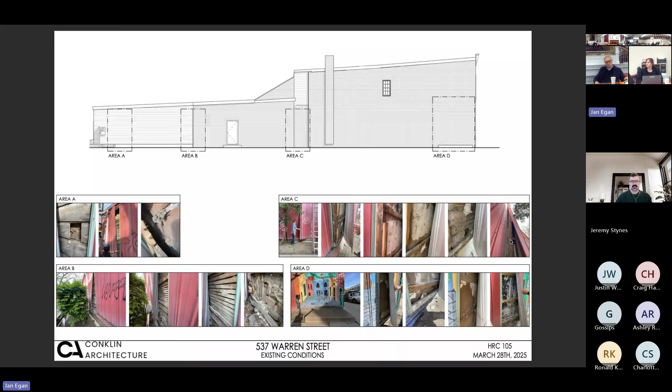Closer images - this is on the back portion of the building, close to the alley. There's wood horizontal siding, fiberglass insulation. This is down low, there's some brick mixed in, but it's largely a wood frame building back there. Next.

This is in the mid part of the building here. So we've got that lath again. There's some brick where brick walls used to be, a sort of party wall between the two structures, I believe.

Next. As we're closer to the front of the building here, this is the original corner, the original corner of 537, the rear corner. We're going to have to do some repair, there's going to be more areas like this where there's brick failure or brick missing. We're going to have to do repair work and repointing and cleaning up the brick.

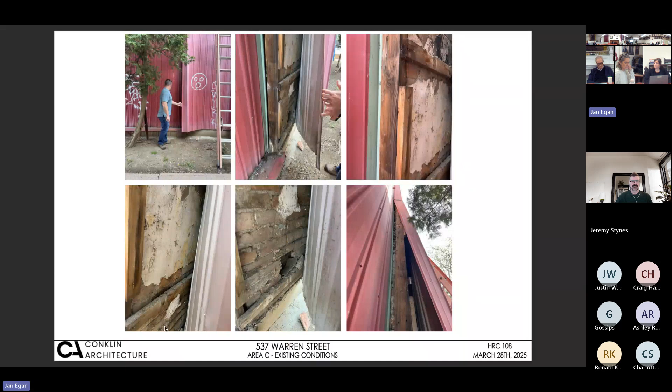Well, I'm sure there's opinions as to what we should do or not do with that. I think that's a conversation. Our goal would be to remove that. If there's a person or a place that would like to have this, great. I don't think anyone's looking to take it off and dispose of it into a dumpster. If there's opportunities for somebody or some group that would like to have it.

Next. Existing portions, existing drawings of the building.

The red is existing openings with windows that are going to come out and be replaced with new. So, Warren Street elevation: the current entry door is here. Window, it's not really a door, but it looks a lot like a door, and then some windows up top. These openings will remain. We're proposing to replace those with new windows and/or doors into the existing openings, not make new openings on this Warren Street elevation.

To note, at our last meeting there were conversations that we had proposed these windows in the center were going to come all the way down to the sidewalk. After looking at this, we've decided to keep those at the current height where they are, so they'll be about a foot or so above the sidewalk, as they are today.

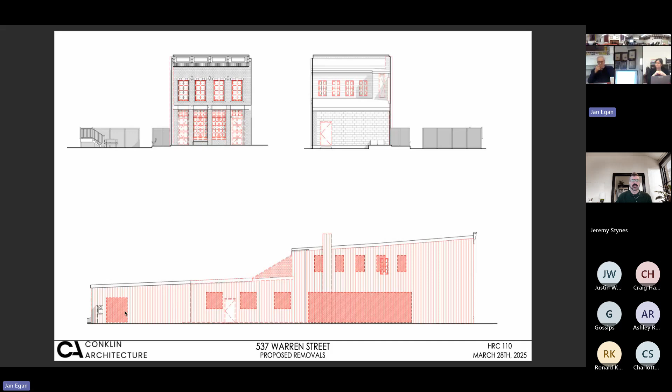I'm not sure of the historic significance of the park side of the building, as I believe there was a building here at one point, but that's for you to tell us, I guess. Next, proposed elevations.

Again, we are going to clean this cornice up, paint it, new windows, new door, new entry door shifting to the uphill side. This will be the new entry door, the window, a fixed door that will just be sealed, and a new lower millwork detail across the top of the door, which we provided a drawing. We'll get there in a second.

The park side of the building, again, we're going to clean up that brick. We're going to add these windows, we're going to add this new glazed opening, doors and windows, the same trim work detail across the top of these that we're going to see on the front of the building. The brick ends at the original rear wall of the building.

Our goal was to break up this elevation of the building to make it look more as though it's 3 different buildings, even though it's one. So it's going to be brick, then more of a horizontal siding section in the center with 3 windows, and then we'll allow the sloping roof to remain on the back, keeping horizontal siding back there, chopping it up into 3 different components. The rear wall from the alley.

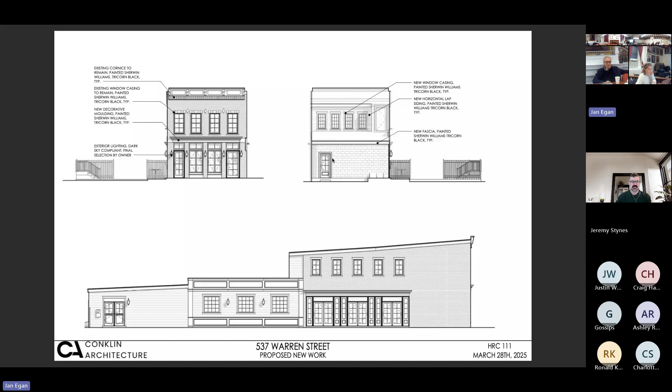Next, close-up renderings.

Renderings are tricky. Anyone who's done renderings would tell you they're tricky, especially trying to do shadows and working with the lighting, trying to make it look right. I think these renderings are a little bit, I'm going to critique them a little bit. It's the shadows, it makes it look a lot blacker than it really is. Just on our way up Warren Street coming here today, we were noticing all the brick buildings that are brick with black windows. And this sort of looks a lot more like, whoa, than what exists and what it will look like.

Black windows, and paint the trim around those black. That's our proposed idea right now. This new wooden element being black, and black fixed door, black window, black active door.

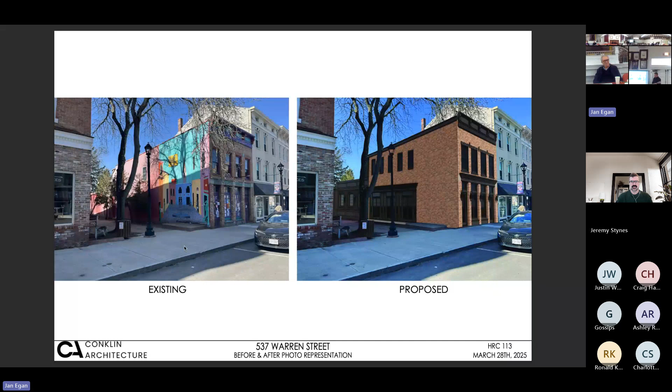I think we led with this slide, but this is just a before and after. So what we see today, the tin, the colorful front facade, and what we're proposing to do to it. Just sort of really clean this whole thing up and bring it back to life and make it an exciting part of Warren Street.

Another rendering from back in the park, comes off the side of the building. This is that rear section of the building where there's a door back here further. The image is hard to get at the right angle, but this was useful to look at. This is the midsection where we've got three fixed windows and a new parapet wall, to make it look like its own building. And of course the large glazed wall and a couple windows on top with the brick.

Are you doing any masonry repair on the brick?

We're going to have to, I'm assuming we're going to have to do some masonry repair once that tin comes off. I don't know what it looked like before the tin went on, and given there was a fire here, I don't know what condition things will be in behind there, but I'm expecting there's going to be some repair and repointing happening to the brick.

We usually ask for some kind of statement or formula to make sure the mortar is appropriate. So how does the committee handle that today? You should, we'll put a statement in the C of A or whatever document with your agreement that you will make every effort to test and match the mortar to the existing structure, so we don't end up with something that's a lot harder.

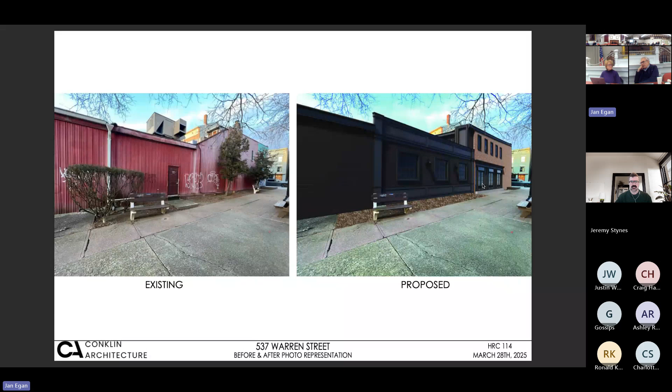Yeah, thanks. Another piece of information that was requested last time was more information on the window types and door types, so we added those to this.

Coming down the side of the park, this is an enlarged version of what we're proposing: currently a side light, active double door, double side lights, active double door, double side lights, and active double door, with a side light and transoms above each door opening.

Moving further down the park, we've got 3 fixed windows identified as type G—though I think we've actually got these labeled wrong. This is type D, the window going in here, 4 foot 10 by 4 foot 10, to give you some scale.

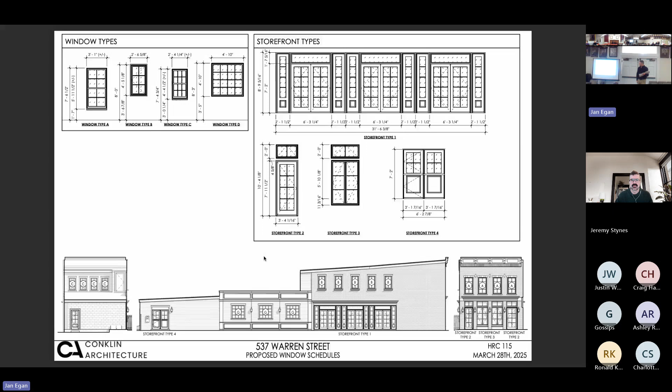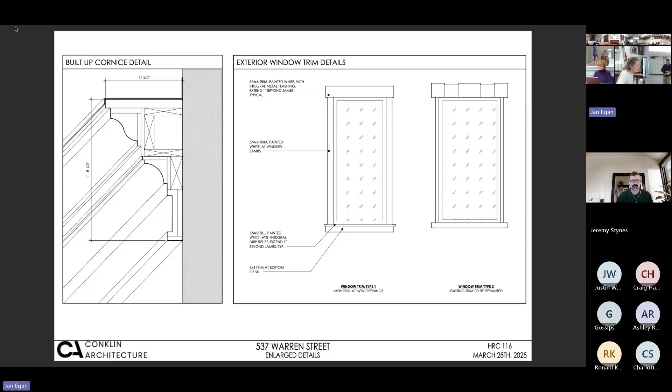Okay, so let's hear your thoughts and questions.

Well done. Jan, do you have anybody online? Is it all us? I have quite a number of people online. Thanks.

Let's see, okay, well we'll go with commission comments. I don't have any raised hands. I'm sorry, it's a public hearing, we don't need commission comments. I don't have any raised hands at this point. Any hands up?

Would anyone online like to speak about 537 Warren Street, the Mexican Radio building the architects have just presented? Hello, this is Matt McGee. I'm having a problem getting to the hand raising icon, so I'm just speaking up now. Matt would like to speak.

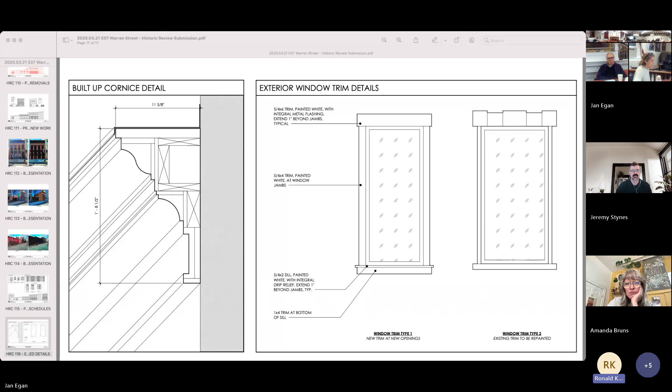Thank you. Yes, I would like to say I think this is an improvement over what's there now. I'd also like to point out, as a matter of interest, that the city has seen fit to have an open space where there had been density. The other thing I would say is, as far as the bricks go, the main concern you should have is that the mortar is softer than the bricks.

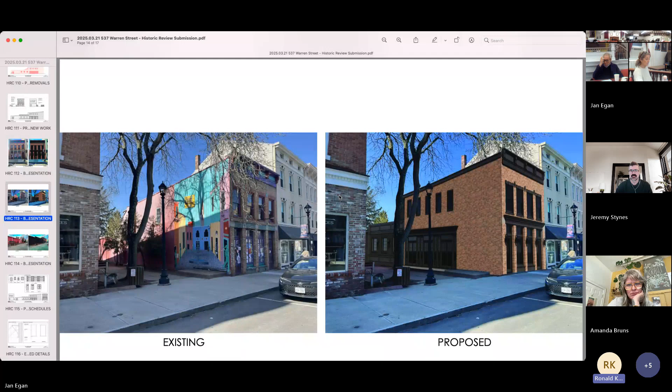The color is generally affected by the sand, so if you match the sand color to what would appear to be the more original mortar on the building, that will be a good guide. Also, these bricks are not as hard as modern bricks, so really hard cement will cause spalling. In freezing and wet weather, some of the bricks will spall and start to decay.

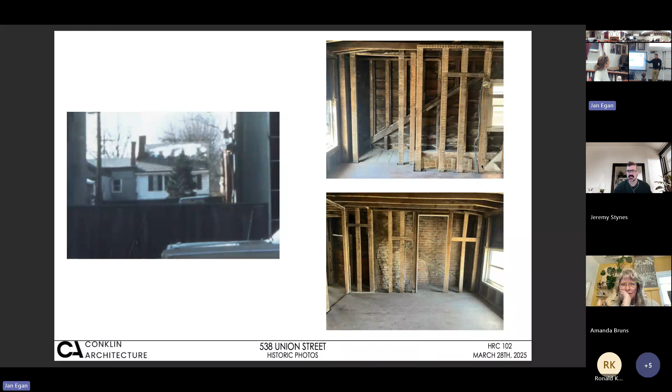These photos were important to share with the committee, as they're from what's today the third floor of the building. I'll make some forensic assumptions here that the front of this building, at some point in its original life, did not have that third floor with the cornice. We've got elements here that lead us to believe there were roof rafters - this probably had a more conventional gable roof at one point in its early life. Someone came in and added this dormer at the front to make more room upstairs. We're not looking to change any of that, but I wanted to point out that this building has seen different lives, as much of the buildings in Hudson have.

Existing front, existing Union Street, it's a very light gray or light blue. The shutters, the windows - all of these windows have been replaced in this building at some point already. There's no weights on these windows, just some sort of metal banding for a weight, which would have been much newer than the old ropes or chains. These are actually aluminum storm windows up top at this point. So all these windows have come and gone at least once in this building.

But our goal is to replace them. Even these existing windows here are storm windows in front of a 2-over-2. So we're trying to keep the 2-over-2, but the modern day version of that 2-over-2 window.

This is the roof structure on the back of the building, with the little covered porch. This little roof will come off, and we'll add a detail similar to the one over the front door, added over the door to the kitchen. And obviously we're going to add this dormer.

There was discussion at the last meeting about the front door to this house - is it original, and what shape is it in? So right here, area A, this is the existing front door. The photos are hard to show - it's wood on the outside, painted on the inside. The bottom rail of this door is not in the best shape; that's really the failing part of it right now, as weather over the years is causing things to delaminate and come undone.

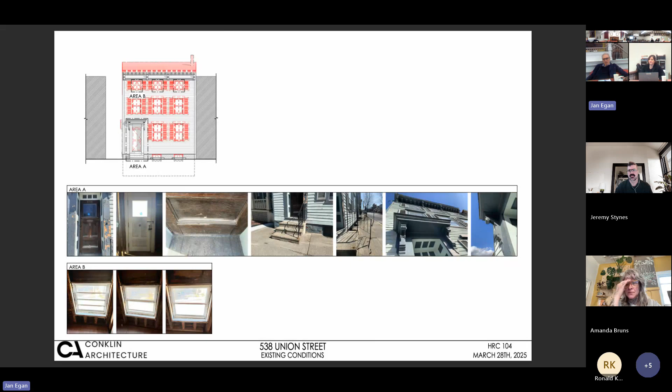If there was a need for an egress window, couldn't you put it on the side where it wouldn't be quite as visible? Just think through your options. Okay, we will take a look. You have large new windows to the rear, and so those might work better.

I might go as far as to say that's the same era as the front door. It's got very similar details that the front door does. Again, I think we would propose to keep that door and use it again instead of replacing it with a new door. And if we get into a situation where there are problems, then we'll talk about that.

We only have one side of the building that is really full exposure, and that would be the west side of the building, which would be a really narrow alley or sidewalk that walks past the building to the rear yard.

So taking out some windows, again, removing that back porch. As a part of this renovation, we're actually going to take the entire roof off and put it back on. It's just one of these dollars and cents decisions that we're going to put it back on in a like manner. But the existing structure, for structural reasons, the existing front portion of this roof is undersized and not in great shape. So as a part of fixing everything, we're going to be insulating this building.

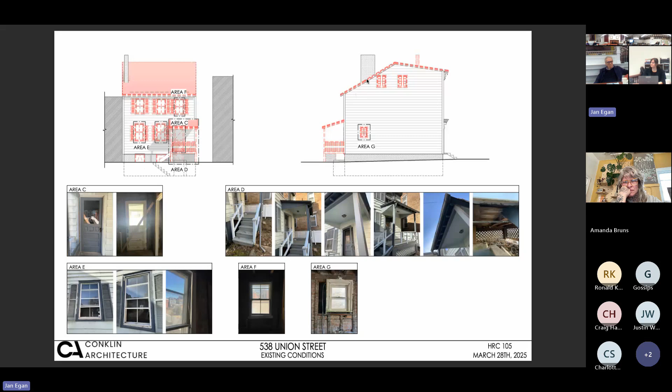Let's keep going. Next slide. Okay, so this is blown up pictures of the existing doors, exterior in front, exterior of back, inside. But this is just trying to highlight the fact that this is where it's failing. This existing door has had snow and weather beating on it for a lot of years.

The front stoop, the railing, that's a wrought iron railing. We will propose something as an improvement to that. So that's something that we will get back to you on.

I think in my mind, I expected that there was going to be another trip back here for this building, but maybe I shouldn't have made assumptions. We will have to come back to give you that information and look at the windows for the third floor and that sort of stuff.

So there's currently an area where you can see right here, there's a spot where there's a basement door, so you can see down underneath the back deck to get to a door. This is kind of the retaining wall, the door's over here. So this is a shot of the underside of the deck, but it will be removed and replaced with something more appropriate.

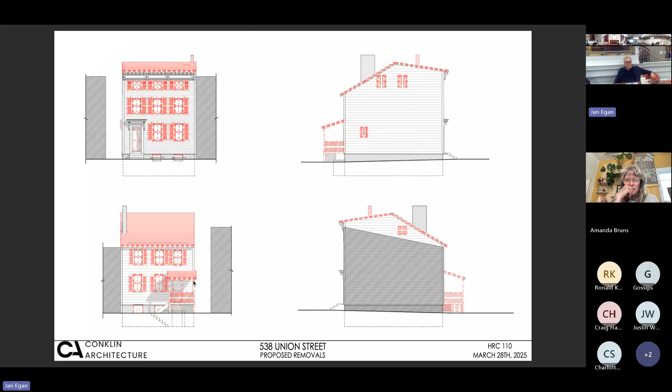I believe the proposal is that this upper roof, because of the pitch being almost flat, is going to have to be a rubber roof. The lower part where it comes around, the dormer, will be asphalt shingles. And the front of the roof that's currently there is asphalt shingles, and that would go back as asphalt shingles, facing Union Street.

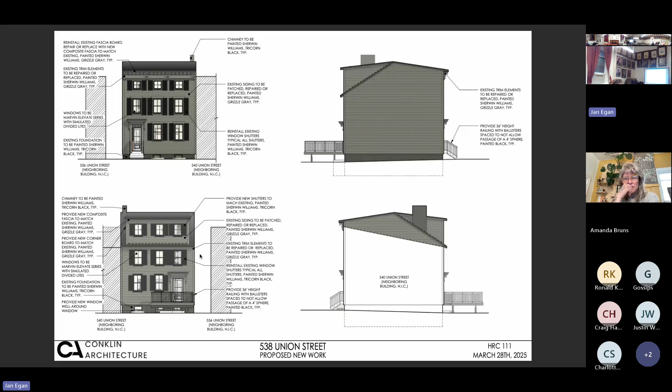Before and after, it looks a lot like it does right now, just with some repairs. There's siding that's broken and damaged and falling off, and we've got to replace what needs to be replaced, maintaining as much of the existing as we can.

All of the upper cornice will stay, and all of the details around the front door will stay. In the rear of the building, similar story—it's in pretty sad shape back there. We are going to clean it up, add the dormer, paint it, replace the windows, and upgrade the deck.

Windows. Union Street side. We were proposing those upper windows be casement windows. We will evaluate that to see if we can find a better solution that's more in line with what we need to be doing in terms of double hungs.

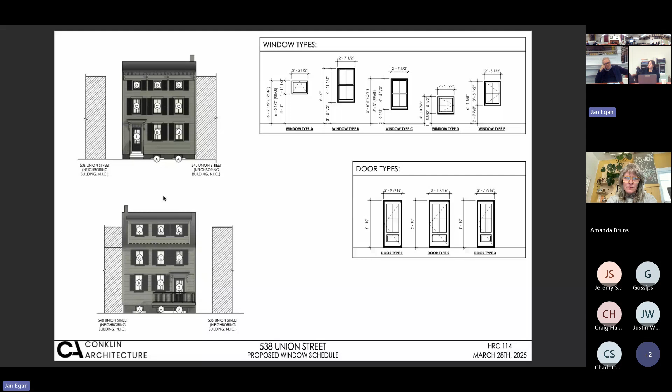In terms of a public hearing, the board needs to consider that. My feeling is that you're not changing any of the mass, not significantly reconstructing, deconstructing, or changing the shapes of any aspect of the building. You're not, God willing, removing critical historic materials, and you're not changing any of the openings, so I'm not sure it necessarily requires a public hearing. I think what you are doing is bringing the building back to life, which is pretty cool. That's really the goal of all of these projects.

Shingles, colors, exterior colors, shingles, light fixtures—any light fixtures, obviously we're going to do the dark sky compliant LED lights.

This is, maybe I'm wrong, maybe we did give you window information. So what do you need for the specs? So these are Marvin Elevate windows. Do the call-outs so that your taxonomy is right and we can follow it, and Craig can follow it. And then from those call-outs, we want spec sheets. For the window, if it's Marvin Ultimate, blah blah blah, we want the spec sheet for that.

So in terms of this slide right here, we have identified the exterior fiberglass color of this Marvin Elevate window. Do you need more information on the Marvin windows than what we're showing you right here in terms of colors and stuff, or?

I think if you can just grab the manufacturer's spec sheet for that specific window and attach those as part of your pack, it's very helpful for code to have that on file. I mean, I think we would be doing that for the code anyhow as part of our building submission—I just wasn't sure how much of those specifics the historic commission needed or wanted. We in code are part of the same process in other ways, with different lead responsibilities, but it's the same materials.

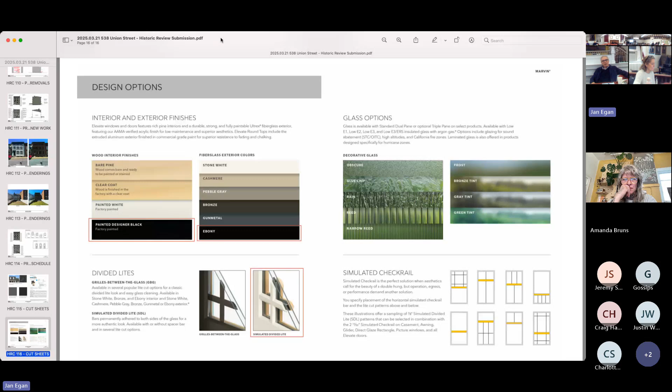Is this it? That's it. Okay, well, there you have it. So that was Union Street. Terrific. So you can call, write, or query any of us anytime. Certainly get in touch with Craig on the egress or any issues around that. And if you don't mind, I'd like to go back now and see if we can finish up on the Mexican Radio.

So we've heard from the public. Commissioners, thoughts and feelings on that proposal? I think it's a great project, done with a lot of thought and sensitivity, bringing an old building back. I think it's quite good for the town. I agree as well, I like the bring— other folks, John? I think this is excellent. I'm enthusiastic in my support.

The motion to find the application complete—Paul and Miranda, all in favor, aye. We've done the public hearing.

I motion to request the city attorney prepare a COA, contingent on the spec sheets, including the removal of the siding language that we discussed, and including the mortar language. We'll get—if somebody would remind somebody else—to get in touch with Kim on mortar.

Yeah, we have a commission architect, she just came here today. Did we just join two projects together? We're talking strictly—no, we're talking Mexican. Okay, okay, only Mexican, okay, I just wanted to make sure. No, I'm glad you made sure because I could have lost track. Okay.